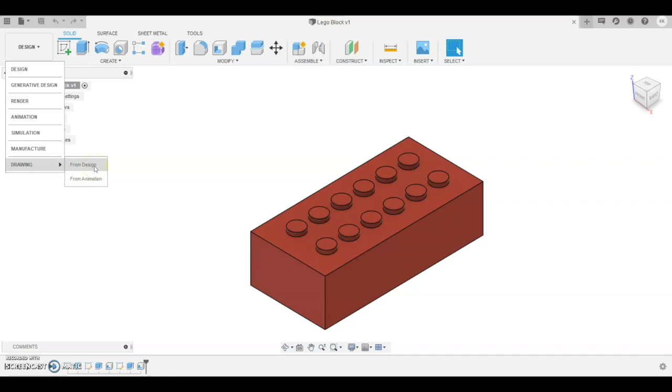So what you can do is you can actually pull up your part, because typically you'll have your part made, and then right from your made part you're going to want to create a drawing. So over in the top left corner where it says design, you want to click that, and then you have some options. If you go all the way down to the bottom, you're going to have drawing, and you're going to click from design, which will take it right from your main design. It's going to highlight your part, or it should highlight your part.

Over on the right hand side, you're going to have some options. You want to create a new drawing. We don't have a template that we could use, so we're just going to say it's from scratch. We're going to use the standard units. The sheet size we are actually going to make an 8.5 by 11. So we're going to change the sheet size from a B to an A.

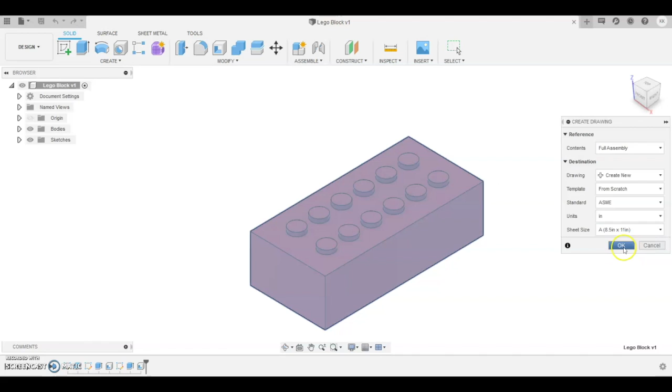And there's two different orientations. You can have it in portrait mode or landscape. Typically the drawings are in landscape, but I'm going to choose portrait for this one, and you're going to see why in a minute. Then you click OK, and it will automatically generate kind of Fusion's base template.

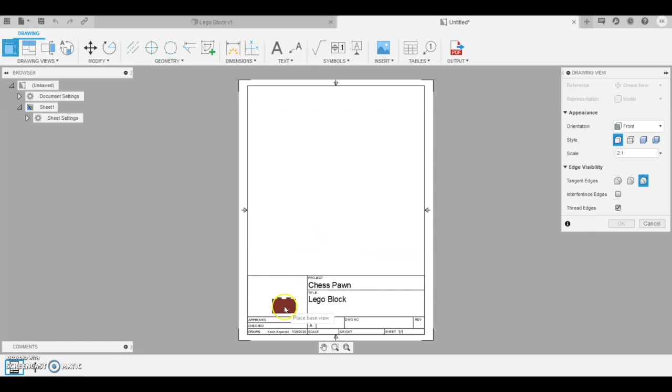Now the reason that I had selected the portrait mode is because it puts all of the information down here at the bottom, and this is kind of, I think, a large area for your information. We could create a new template that has smaller information and not so many lines, which would give us more room to have our drawing pieces, but for right now it's okay.

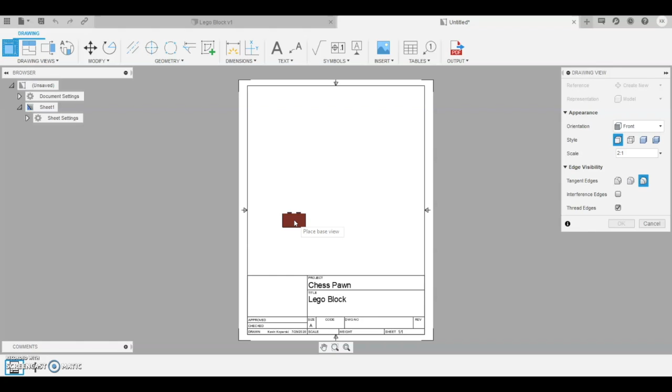So the first thing it's asking you to do is to place the base view. Before you click anything, if you notice that the side of the part that it's selected is not exactly what I would consider the base view, right? Your base view should contain the most amount of information as possible, the most amount of detail. So over here on the right hand side under orientation, you can change what view you're looking at. So I can change it to what they call the quote-unquote top view, but I'm going to use that as my base view. And I'm just going to click.

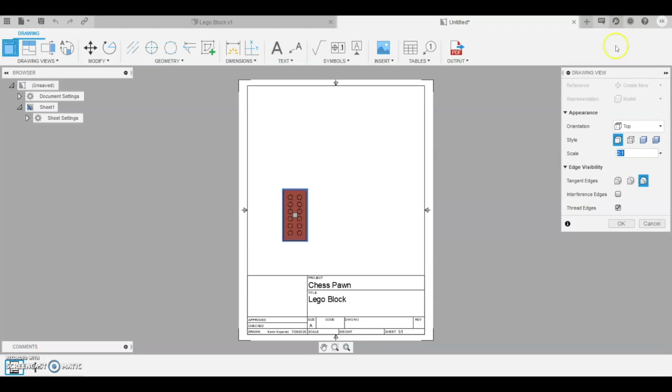Okay. Now I can also change the scale, right? I can change if I want it shaded or not shaded. I can show the hidden lines. I could not show the hidden lines. And again, you can adjust the scale as you see fit. For this example, I'm just going to leave everything kind of as is and click OK.

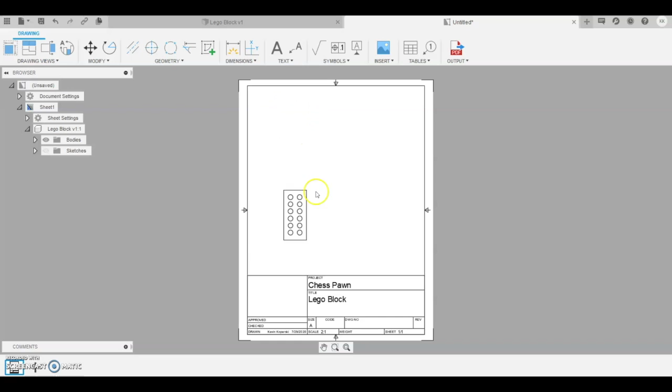You might be noticing down here, why does it say chess pawn? That's because that was the project folder that I saved my Lego block in. This may read different for you. So that's why that says that. To put in my other views, I'm going to need a top view and some kind of side view here along with my ISO. Those are the typical views.

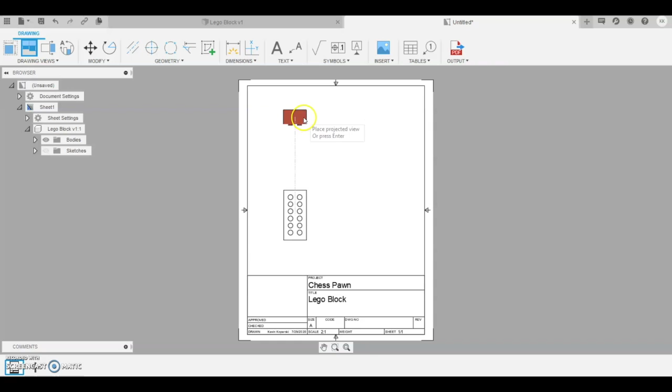So over here in the top left-hand corner, you have a projected view option. And if I click on that, it's going to ask me to select the parent view, which is the view that I'm coming from. So I'm going to select my front view. And if I click and drag up, notice it gives me what that view is going to look like. And I can click. And then I can do the same thing here with the side view. And if I press enter, notice those things go into place.

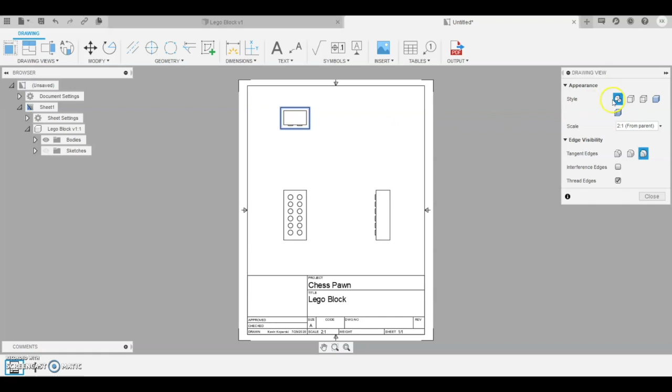Now you're going to also notice that I probably want to show some hidden lines, because underneath I know that it's not a solid object, right? I've got those shell features and some other stuff going on. So if I double click on the part under style, I can change to show the visible edges underneath. And I can do the same thing with this one.

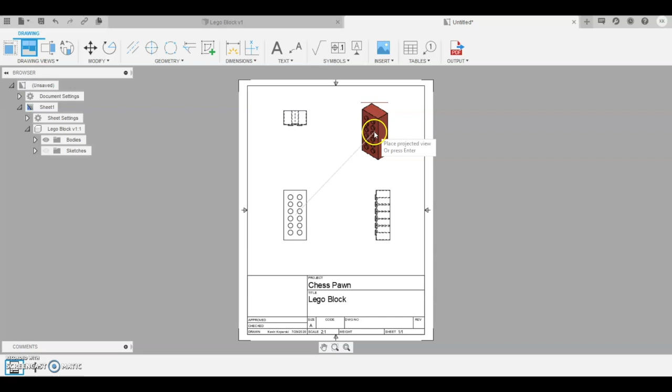And then the last thing I'm looking for is an ISO image here in the top corner. So I do the same process again and click and drag that guy up there. Now, typically this part is shaded in or has some kind of contour or color to it. It doesn't have to. Okay. And now the next step would be dimensioning.

So if I zoom in here, so again, a scroll wheel or using your fingers on your trackpad, I'm going to zoom in here and I'm going to start dimensioning what this is going to look like. So I'm going to start dimensioning the circles. All right, so to dimension your circles, you're going to use a center mark. I'm going to click just one of the circles because it's a pattern. Okay, I don't need to dimension every single circle.

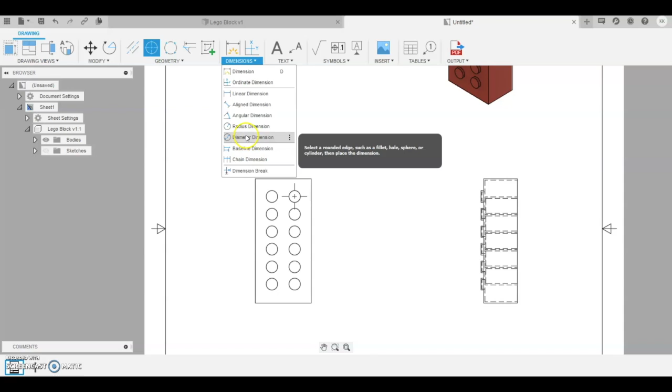What I can do is I can create a note. So after I create a center mark for my circle, under geometry, under dimensions, I can go to a diameter dimension. And if I select the circle and pull this guy out, it tells me that that circle has a diameter of 0.1. Right. Now, this has a couple things we're going to need to edit. So over here, what we can do is we can double click the dimension.

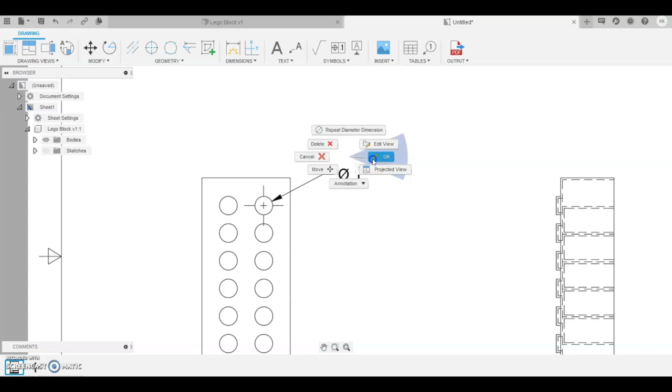So I just right clicked and clicked OK, or you can hit enter to place your dimension there. If I double click on the dimension, it brings up kind of an edit feature. Anything that's inside these kind of arrow shaped heads here, that's your dimension. Anything outside of that, we can type.

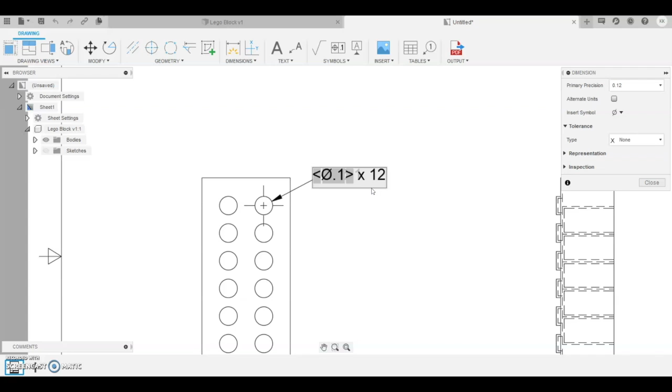So if I put my cursor at the end, I can type X, which is going to mean times, and I have 12 of them. And then I can abbreviate PCS, which means pieces. All right. So that's how I add a note to it, and I hit enter. So this tells me that there's going to be 12 of these circles.

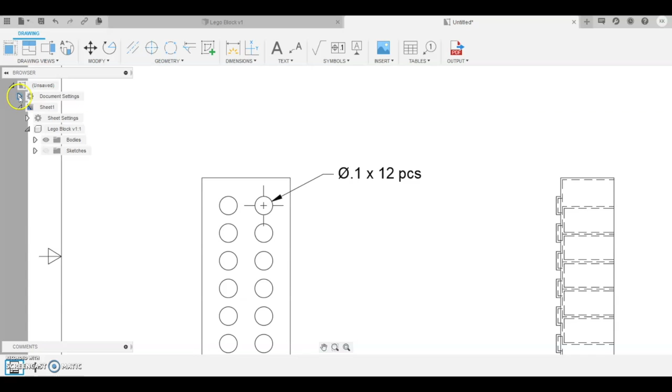The other thing, and this is more of a personal preference, but I like having a leading zero, meaning a zero that occurs before the decimal point. So to get that, over on the far left side, underneath document settings, there's an arrow, and this is why I think Fusion's a little bit nicer than Inventor or even Onshape, is because it gives you every preference that you have right here, rather than going through another pop-up box and trying to find something that way. Because if I look, it says right here, display leading zeros. No. Well, I want to change that to a yes.

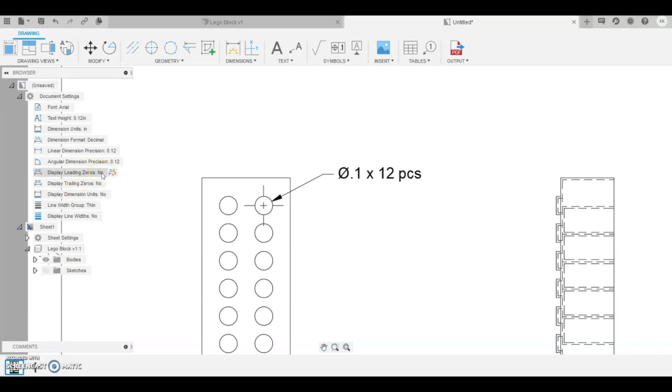So to change that, I'm going to select the little icon right next to it. And what it does, it opens up the entire document settings window over here. Now, the only thing, at least on my computer, that's a little wonky is it doesn't allow me to drag the box out unless I pull this whole thing. And even then I really can't select a lot with it. And what I mean by that is it just says display. So you kind of have to leave your cursor over it so you see which option is there.

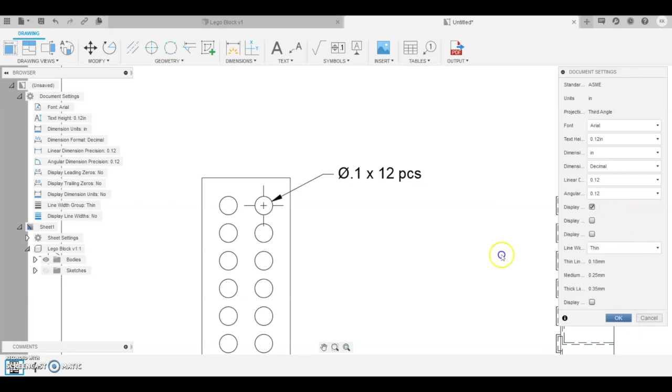So you can show the units if you wanted to. If you didn't know if it was going to be in millimeters or in inches, you can show the units there. But I want to show the leading zeros, so I'm going to select yes for this. Click OK. And then I can go through and start dimensioning my other components here.

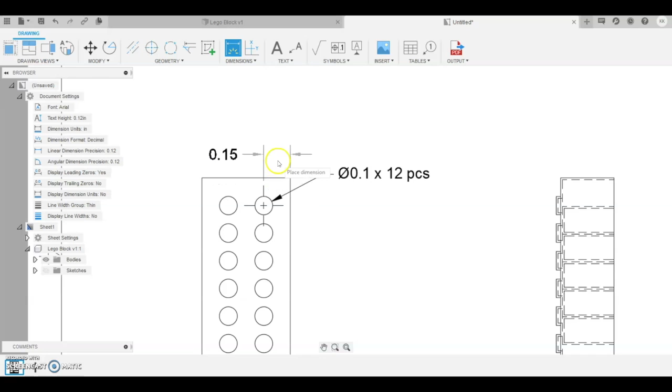So up top, I can select the dimension tool, and I know that I have to figure out the X and the Y for that center of that circle. So I can click the edge, and then I can click that corner, and it kind of already highlights it even before I click of what it's going to be. And I can do the same thing going from the top, going down to that edge.

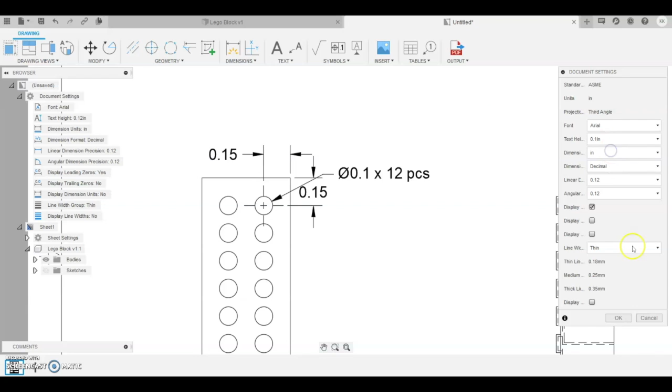So you notice that this kind of gets a little messy here, right? So you've got a couple of options that you can tweak and edit these. You can change the size and the text height, make it a little bit smaller. So again, if I click on this, I can change the text height, make it a little bit smaller. All right, that kind of narrows that part down a little bit. I can also then move this down a little bit, just to get it out of the way of those arrows as well.

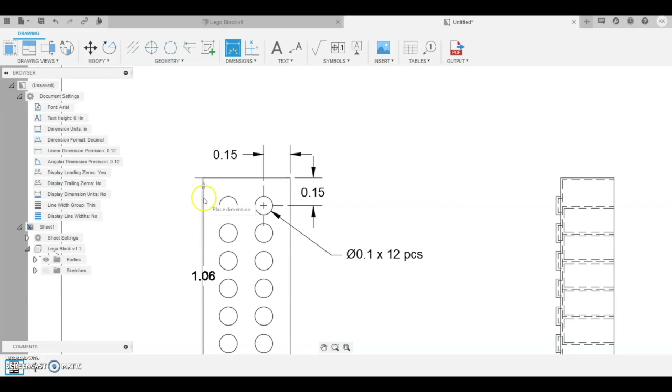Right. And then I can continue to dimension the part. And I can keep going through and dimensioning the rest of the block. So I would do the same thing up top here. And you guys can use my dimensioned drawing as kind of a reference for that.

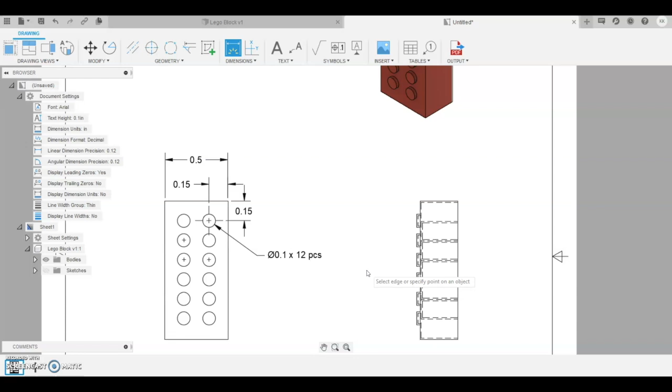One thing I want to make a note of here on the side view is this image itself is really not the best. And I think I even mentioned this when I was first talking about doing the Lego block. This doesn't really help us. Why? Because I can get all of the dimensions from the front view and the top view. I don't really need this. What I'm missing is what this Lego block looks like underneath, right? And being able to see all of those pieces. So this is a scenario where actually I don't need this view.

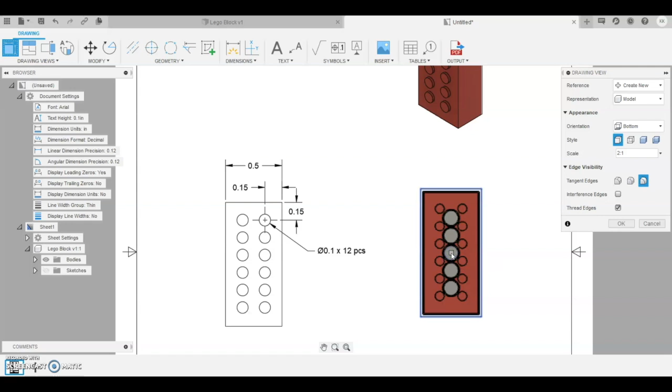And what I'm going to do is I'm actually going to select it and hit the delete button. And then I'm actually going to create a new base view. And in doing so, I'm going to change the orientation so that I see the bottom of it. And now I can see the underside of that piece. Click OK. And now here, right, I can see what the underside of that is.

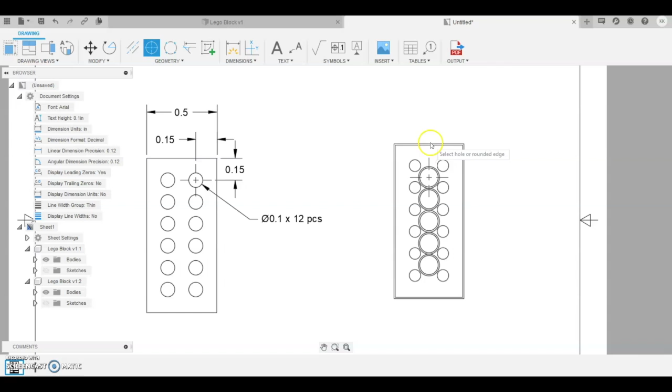And now from this point, I can dimension. I can give myself a center mark. And I can go through now and dimension all of those pieces. So I can dimension those circles. I can figure out how high it is from the top and the side over.

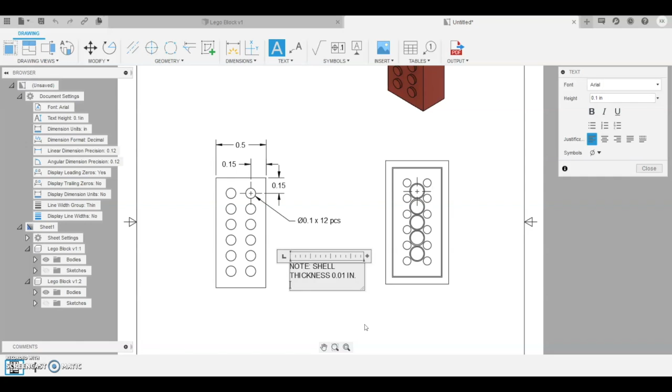The last piece is I just want to talk about how to do a note, and that comes from your text tool. So you're just going to click text, and I can create a text box here. And here's where I would just type in, typically notes are in all capital letters, that shell thickness is 0.01 inches. And I click, and there it is.

And then I can drag this around to wherever I want it to be. And I can move the box. I can make it one line. Whatever looks good in your orientation. So you guys can play around with that a little bit and see what you guys come up with.